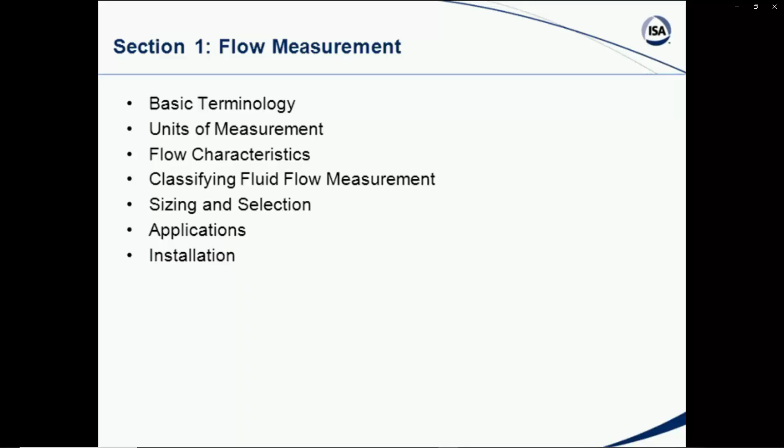Let's talk about flow first. We're going to look at various terminologies. What are we talking about? We're talking about measuring flow. How do we go about selecting some flow devices? How do we classify flow measurement, and some of our applications and some installation? Now, we won't get heavy into a lot of theory, but just to say, in fluid dynamics, this is a basic Darcy formula that you look at in fluid dynamics, showing the pressure drop in feet of fluid flowing through a pipe and how it's related to the fanning friction factor, and of course, the length of the pipe.

Notice we have a factor of V, velocity of the fluid, which is squared, and that's divided by the inside diameter of the pipe and involved with the acceleration due to gravity. Notice the square root function on velocity is related to the differential or the drop in head, and that's how we'll see later on how we get into the square root relationships in certain types of flow measurement.

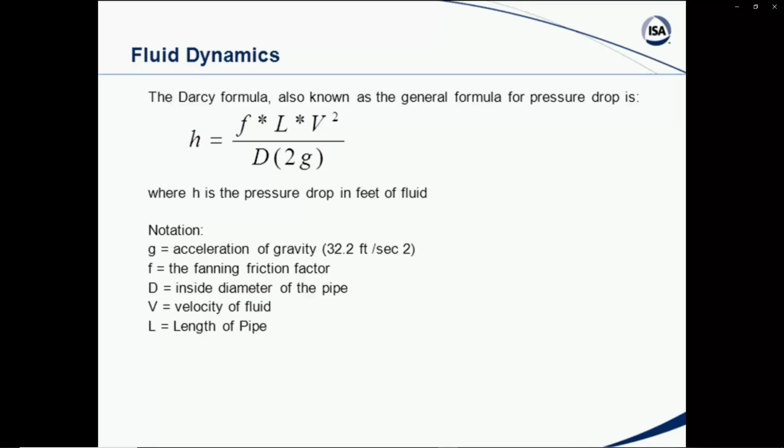So this is a basic fluid dynamic equation for flow. Now, if you go through a lot of derivation and theoretical mathematical calculations, you can come out with a couple of formulas that will be very useful to us, and this is one of them, where we're talking about the measurement unit to express the rate of flow, the velocity.

In other words, how fast is a particle of a substance moving over a given period of time. This is one of the common things that we talk about, the velocity of the flow rate of a fluid, whether it's liquid or it's gas or steam.

And the basic equation, if you go back and work through a lot of the Darcy situations there, is Q is equal to AV, where the volumetric flow rate is equal to the area of the pipe times the fluid velocity. And we will use this as a basis for a lot of the measurement techniques and technology that you use for flow.

Right below this, you will see that I have put in a second equation that says that Q is equal to 3.12 times AV. This is true when you're dealing with gallons per minute. The area is in square inches, and the velocity is in feet per second, which is our normal units that we use a lot for this particular equation.

So what I've done is work out to 3.12, a numerical constant, taking into account feet, inches, seconds, minutes, etc., so that we don't have to do that every time we make a calculation. But do remember this basic equation, Q is equal to AV, and it will be the basis for a lot of our flow measurement.

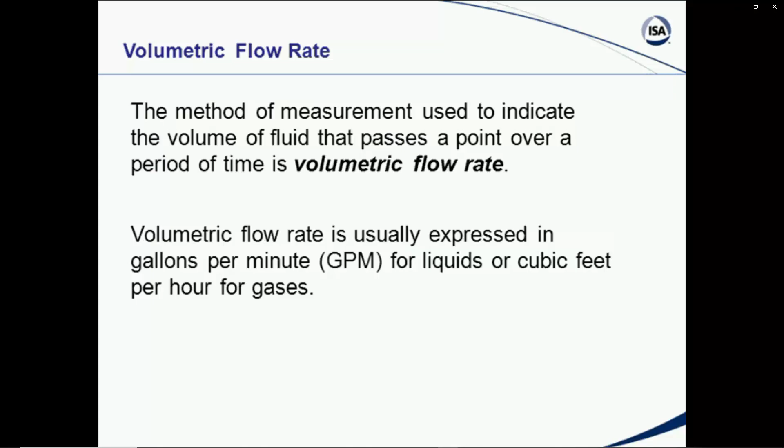We'll talk about some of that a little bit later on. But volumetric flow rate we use quite a bit. Also, though, we talk about mass flow rate. And as the name indicates, mass flow rate is determining the amount of mass that passes a specific point over a period of time. In other words, the weight that's flowing through the system.

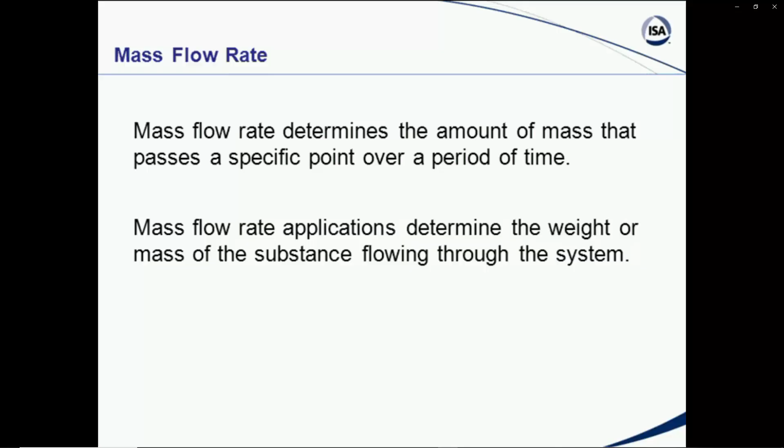And the mass flow rate of a liquid would be the density times the volumetric flow rate, would give you, in other words, the mass flow rate would be equal to the density times the area times the velocity. And so we will be talking on occasion about mass flow. That will come up in some of the situations we look at. And, of course, in steam flow, we normally talk about pounds per hour, which would be the weight pounds per hour that's actually passing.

A critical factor that we need to understand is what a flow looks like in the line, and a relationship of a factor called a Reynolds number. The Reynolds number basically is the ratio of the liquid's inertial forces to its drag forces, and it has to do as the flow is proceeding down the line.

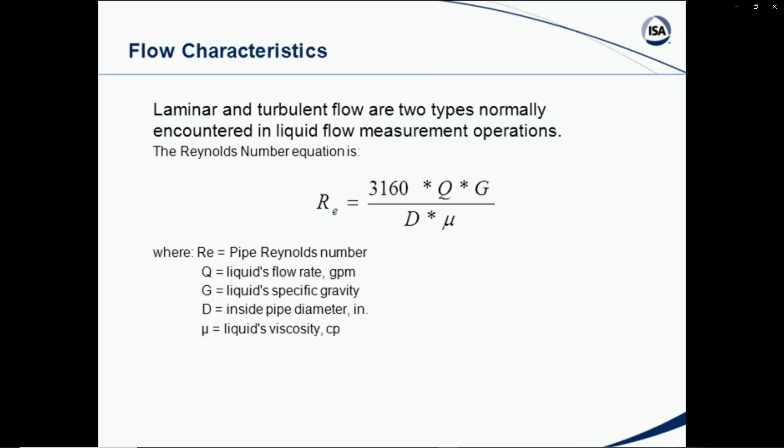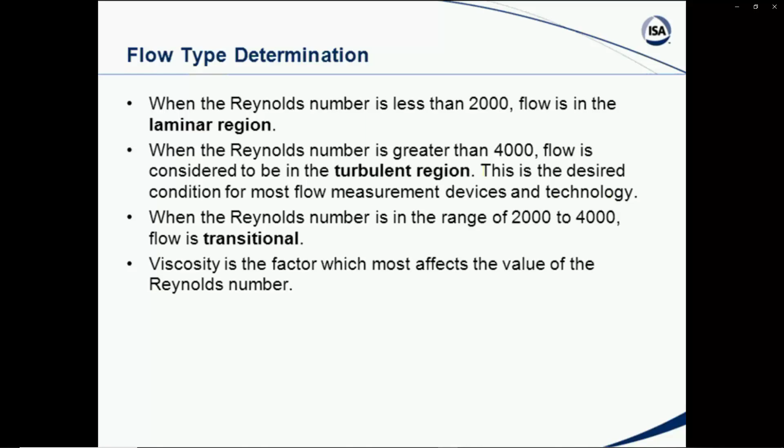So we have 3 regions that we look at. One is called the laminar region, where our actual Reynolds number is very low. We also have an area called the turbulent region, which is actually what we want to have. We would like to get a Reynolds number above 4,000. Actually, in some books you'll read, you'd like to get it up to 8 to 10,000, because between 2 and 4, or even up to 6 or 8, you can still be in what's called the transitional region, and that is an area we don't want to be in because of the velocity profiles we looked at earlier. So typically, the higher the Reynolds number, the better our velocity profile is, and the better our chances of making an effective measurement of flow.

Let's classify our flow measurements into 4 categories: inferential, velocity, volumetric, and mass. We're going to move through these briefly so you can see how these things relate to each other.

First, I'm going to mention the differential pressure measurement. Differential pressure type measurements come in many different forms, but basically they can be used to measure the volumetric flow rate of liquids, gases, and vapors, including steam. As we'll look at a little bit later, there might be some limitations because of suspended solids in the stream, maybe viscosity, and certainly Reynolds number has to be looked at. However, they're very simple, they have no moving parts, and they're easy to use. They do create a non-recoverable pressure loss, and they lose accuracy if you foul them.

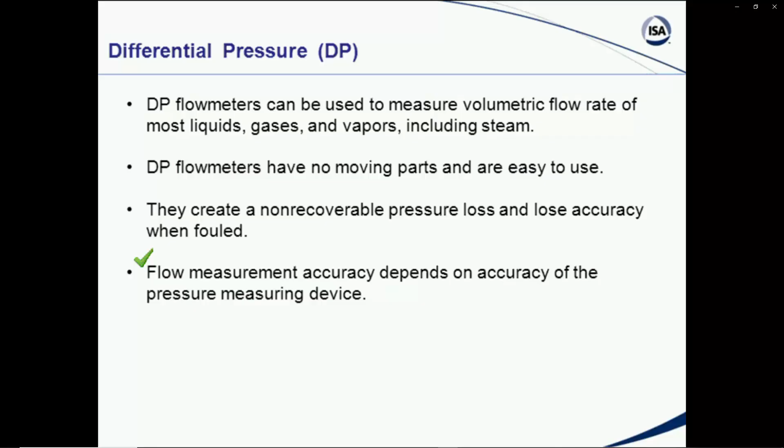The non-recoverable pressure loss is to be expected, because to have a differential pressure, you've got to have a restriction of some nature in the line that drops a pressure as you increase velocity moving down the line. But that change in pressure, or the differential, is predictable and can be used for flow measurement, and is used in many cases by several different devices. The accuracy, of course, also depends on the accuracy of the differential pressure measuring device itself. So you've got to have the sensor, which is a differential pressure restriction in the line, and then you measure the differential pressure to determine what that flow rate is, which is predictable according to the type of measurement being made.

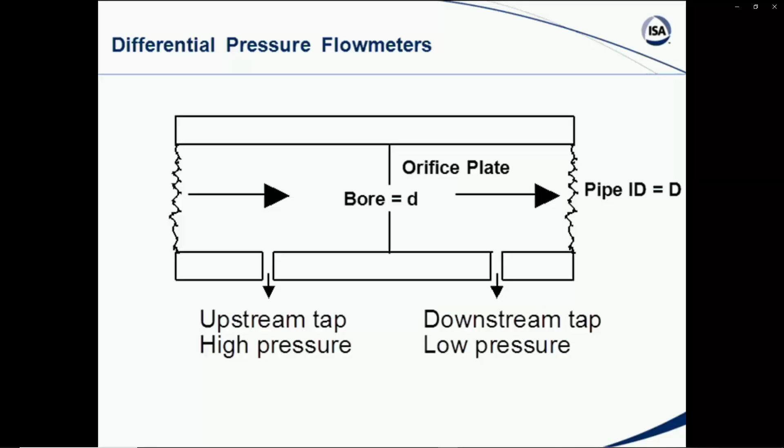We will be interested in measuring the difference between an upstream and a downstream pressure. That will be our differential pressure, based on the amount of flow going through the bore, or little d, the diameter of the bore, as well as the overall big D, or pipe ID. There are different types of devices that can be used and are very helpful in measuring using differential flow.

As I tell a lot of people, if we have 100 gallons per minute here, what's my flow rate here? It's going to be 100 gallons per minute downstream, and that's also the flow rate going right through the primary element. If our number of gallons per minute is the same, remember Q equals AV.

The only thing that's changed is the area. As that area becomes smaller, our velocity rises, it increases. Just like you move an electrical current through a resistor in an electrical network, we have a pressure drop instead of a voltage drop.

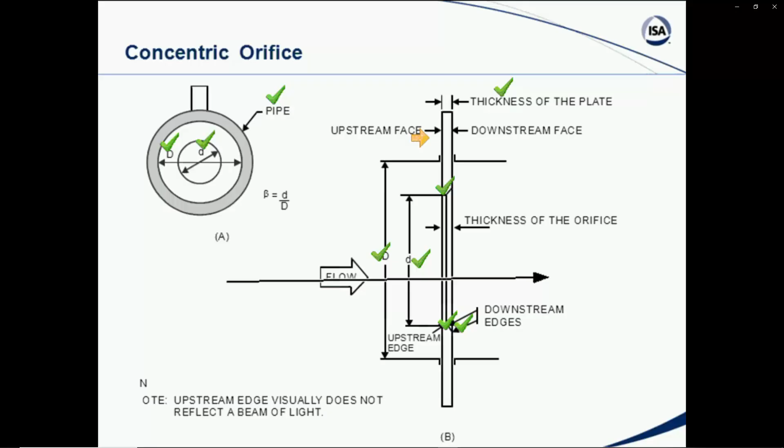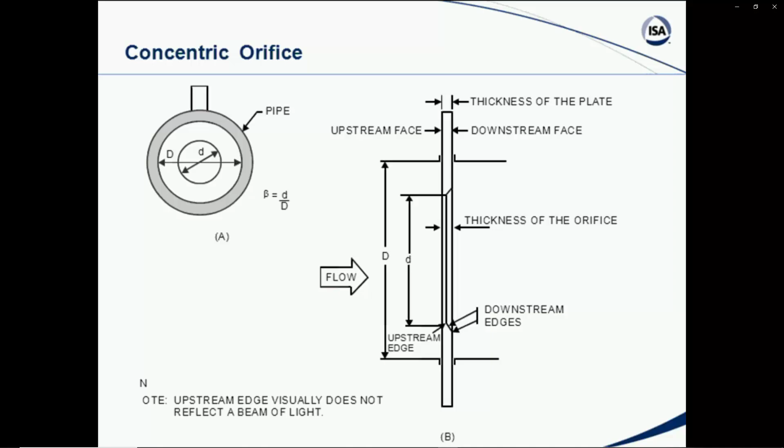There are several different intricacies we won't have time to talk about, such as an eccentric plate. There's also a segmental plate, and there are occasions where you might see a little 1/8-inch hole either at the bottom of the line when you're flowing gas, so that liquids might drop out and drain down the line. Or if you have a liquid flow, you might have a small 1/8-inch hole at the top of the pipe in the plate, so that any gases formed may vent down the line. These are called a drain hole and a vent hole. We could spend a lot of time talking about orifice plates — they're very common, you see them in many, many industries.

Then we have to look at where we check this pressure. Different types of taps exist. On some larger lines, many people prefer what's called radius or vena contracta taps, which are actually about D and D over 2 with respect to upstream and downstream. This measures the incoming pressure to the differential pressure device, and then the pressure at the vena contracta, which is the lowest point of pressure.

On some of the smaller lines, we may go to what's called flange taps. These are drilled right into the flanges themselves, where 300-pound flanges are used, and you measure the differential with these taps right across the orifice plate. These are very useful particularly for line sizes 8 inch and smaller, maybe 6 inches and smaller. It depends on how this particular company or facility likes to handle their orifice plates as well as their taps.

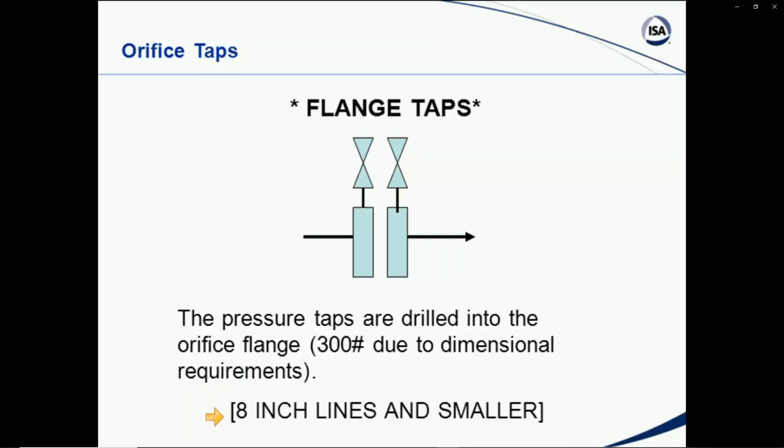So we see here how these are set up, and to recognize, could be on the exam, you might have to recognize another type of tap called pipe taps. While the vena contracta radius taps were taps in the pipe, this is a particular type where the upstream tap is 2.5 pipe diameters and the downstream tap is 8 diameters, and effectively what you're doing with pipe taps is measuring that permanent pressure drop.

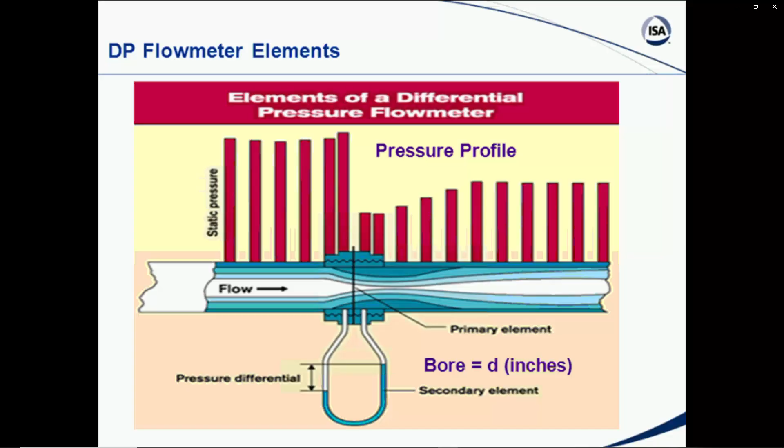Again, if you go back to the picture with the pressure profile, the pipe taps are really measuring the pressure down at this point and this point, whereas with the vena contracta, you're measuring the pressure here and here. So you've got two different sets of relationships, two different situations as far as the drops are concerned, two definitely different types of calculations. There are other types of taps that can get involved, but these are our most common.

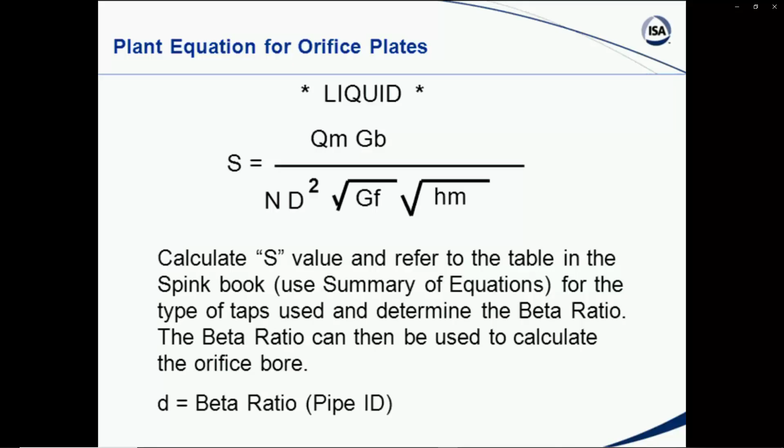In your summary of equations, most of you have that we sent out after the first session, there's an equation which is a good way to size an orifice plate. It's a calculation for an S value, which you can then look up in the back of the summary of equations to find a beta ratio. The beta ratio can be multiplied times the pipe ID, and that will give you the actual inside bore, or little d, for the particular orifice plate. You can see the information you need to make this calculation.

These are the terminology definitions here. Beta ratio is little d over big D. Normally speaking, because of the restrictions of empirical data, that's going to be limited to about 0.25 to 0.75. We also have little d, big D, the flow rates in gallons per minute, the specific gravity which we talked about in another session, the flowing specific gravity, the base specific gravity at 60 degrees, and a unit constant for liquids.

We talk about pressure drop most times in inches of water. When we talk about the pressure drop across a differential unit, it's usually in inches of water. For instance, for liquid, 0 to maybe 100 inches of water, which is about 3.6 to 3.7 psi. The recovery on that, if you were running full bore and recovered maybe 50 or 60%, you might have a permanent loss of a pound and a quarter. Under normal operating conditions, maybe a half a pound, 3/4 of a pound, because you do recover a portion of that pressure drop, but there is a non-recoverable loss also.

Now, the S value again comes from the LK Spink book, but it's also in your summary of equations. There are some tables in the back of the book that you can use to directly calculate the bore for a liquid flow. Here's an alternate equation that you probably won't find anywhere else, because this was derived from the Cameron hydraulic book.

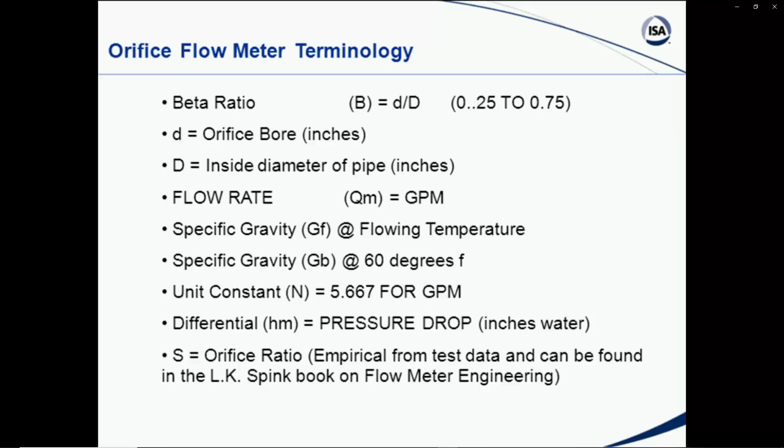So these two equations, for liquids and also for steam or gas, can be very useful for calculations as far as the sizing of an orifice plate. Real briefly, let's go through a few other devices that you will see for measuring flow.

This is a flow nozzle. The flow nozzle, of course, you can see is rather streamlined, but you still have an upstream and downstream differential pressure measurement as the flow comes through. The shape or design on the inside is much more streamlined, and it's very useful for large lines, high velocities, high pressure, high velocity steam, for instance, or other types of measurement, because for the same amount of flow, you get quite a bit lower drop in the flow nozzle than you do in a corresponding orifice plate.

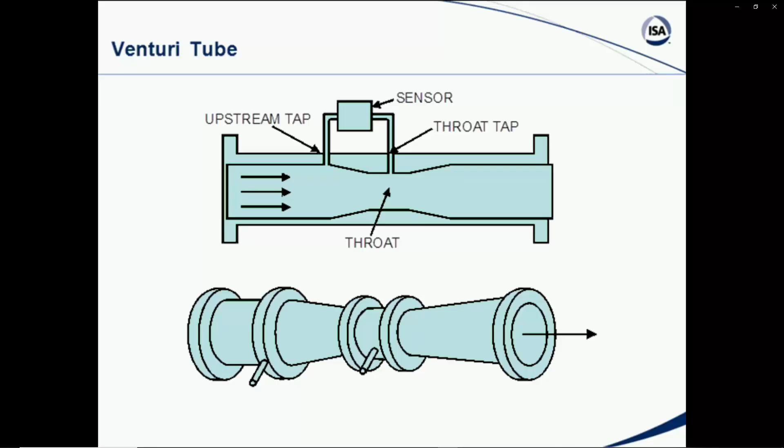And so these can be used in many cases for flow measurement, or a venturi tube, much along the same line. Again, you have the upstream tap and a throat tap. These can be used a lot in very large sizes, and are very useful for different types of measurement. Some amount of suspended solids can be handled here because you have a streamlined throat flow area, which makes it very handy.

Pitot tube is used many times. An averaging pitot tube becomes more handy because it really describes how the velocity check will greatly depend on the velocity profile we looked at earlier. Depending upon the physical location of this pitot tube, it can affect your measurement. But again, it's a differential pressure producing device used in many cases.

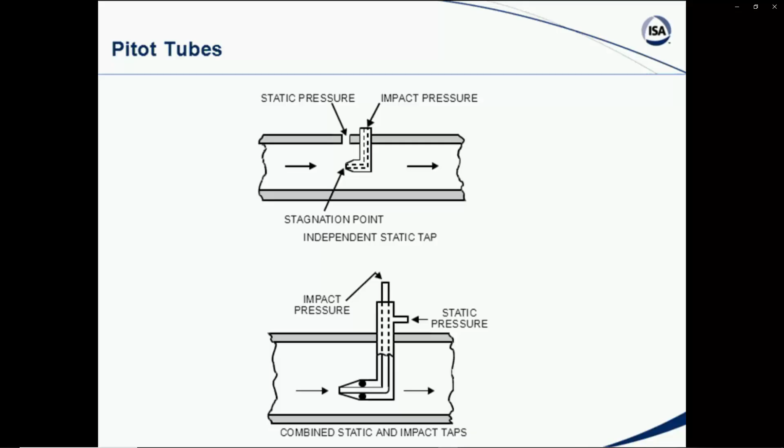Again, an averaging type is used where you actually extend the tube across the pipe with several different holes. So that's some of your major types of inferential measurement, and there are others we simply don't have time to cover today. Let's look at some velocity measurements. One of the types is a magnetic flow meter, which actually sets up a magnetic field across the pipeline.

You actually set this up, and then the fluid flow itself must be conductive. As that fluid flow moves through the magnetic field, depending on the velocity, it generates an EMF that is picked up by the sensing electrode, and that's converted to a milliamp signal proportional to the flow rate.

Whereas the differential pressure unit was inferential because of measuring differential pressure, here we're actually measuring velocity. But since we also know the area of the pipe, and we know that Q, the volumetric flow rate, is equal to the area times the velocity, if we know the area and measure the velocity, then we have volumetric flow rate. They tie together like that.

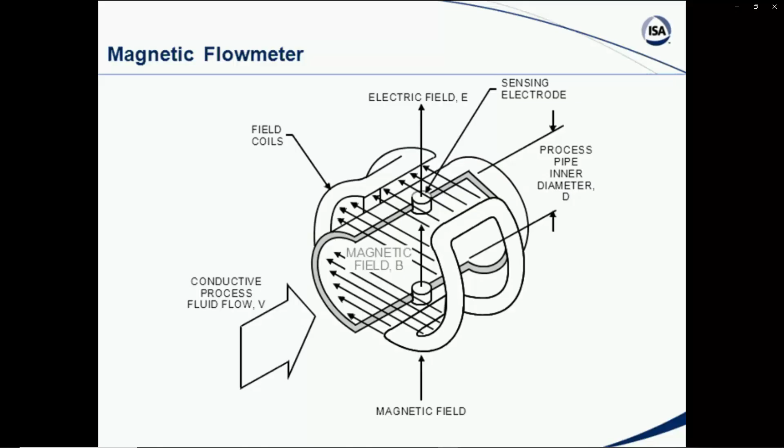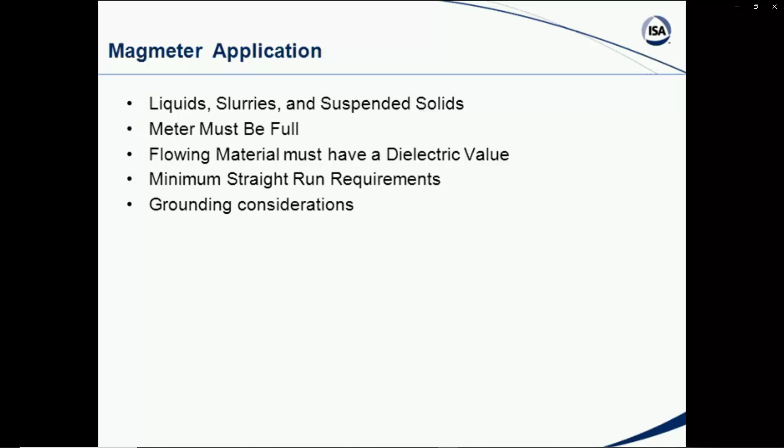So for slurries, liquids, suspended solids, these are just some application notes that could be problems on the exam, some type of scenario problem. The meter must be full. You've got a flowing material that must be conductive, with a conductivity value that lends itself to generation of the electrical value from the velocity moving through. There's very minimal straight run requirements, but you do have to make sure you're grounded properly and installed properly for it to operate. These are some situations to take into account, and mag meters are very useful.

Also, when you talk about velocity, there's vortex shedding or vortex meters, where a bluff body is placed into the line as a sort of restriction. Depending on the velocity of the liquid, gas, or steam moving down the line, vortices are formed, the frequency of which is based upon the magnitude of the velocity of the fluid moving down the pipe. This is called the von Karman effect, showing the flow impinging upon the bluff body and the swirls or vortexes that are formed.

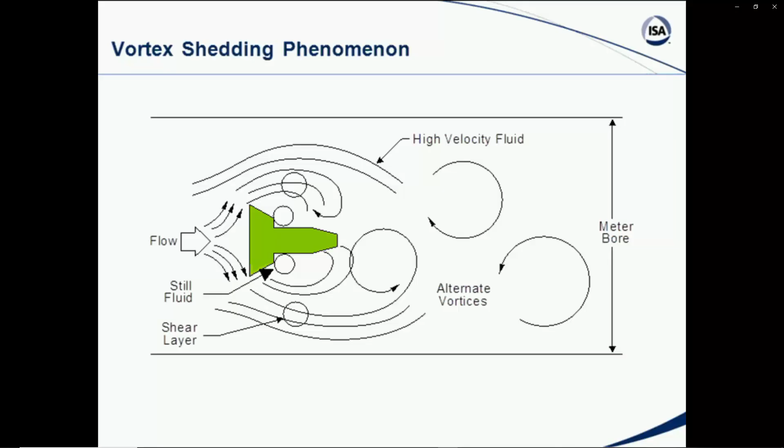The frequency of these vortices is picked up and used as an indication of the velocity of the fluid moving down the line. By knowing that velocity, and knowing the area, Q is equal to A times V, and we're able to make the determination of the flow measurement.

Many people like to use ultrasonics, either Doppler or time of flight. You might have a scenario where you need an ultrasonic flow meter. You can have them clamp-on or wetted. They have certain limitations, but in certain applications like large pipes, flashing or corrosive fluids, they're very useful in certain industries, plants, or locations.

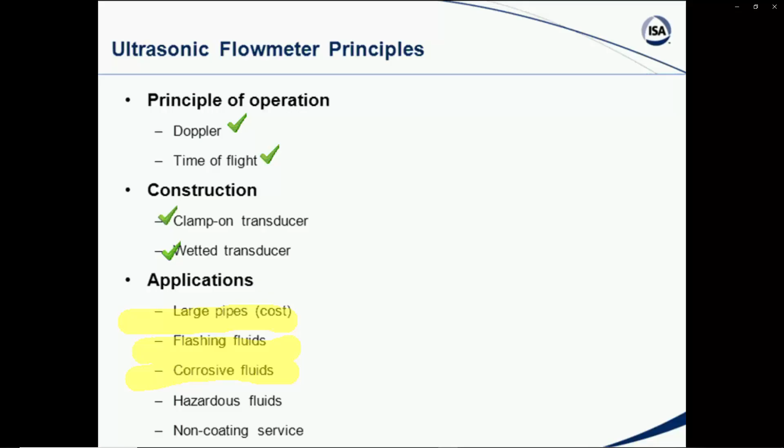Notice that basically you're external to the pipe, and the reflected material depends upon the velocity of the material moving along. Again, we're still interested in that velocity profile. We're looking at the velocity of the fluid, and that velocity is also critical for being able to get a good flow measurement determined.

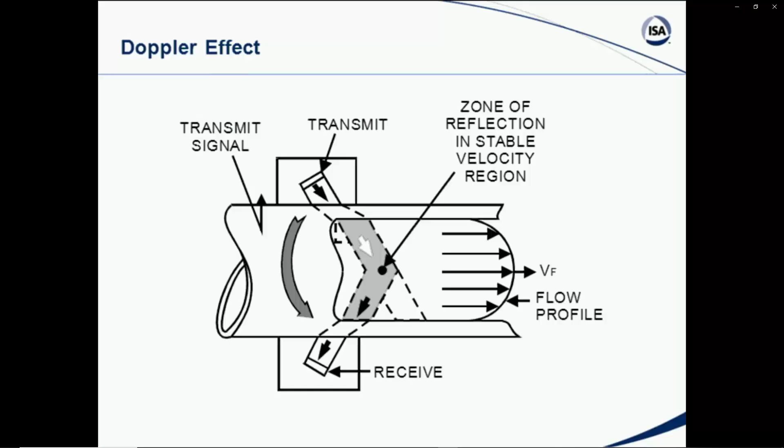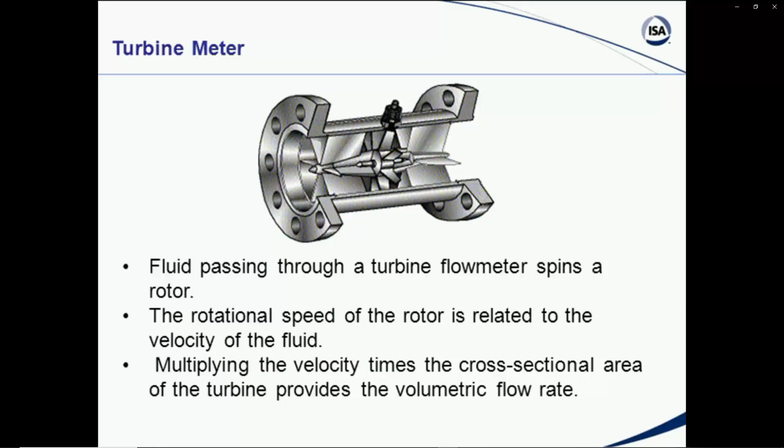The turbine flow meter is used, and many of you may be familiar with these. It's basically a rotor in a line, and as the material comes through, that rotor spins. The higher the rate or velocity, the faster the rotor spins. We pick that up with a sensor, and multiply the velocity times the cross-sectional area of the turbine to provide a volumetric flow rate. It's very accurate, very useful in certain areas.

The mass flow meter - there are only a couple of different ways of measuring mass flow directly. The Coriolis mass flow meter was brought into place several years back. There's also a thermal mass flow meter for gases, but we'll mention this one here: Coriolis, where the flow comes through a vibrating tube. Vibration is set up, and as the flow moves through, the fluid forces react with the vibrating flow tube and produce upward and downward forces. The net result is a twist angle, and this twist angle is directly proportional to the mass flow going through this device. It was originally introduced by Micro Motion.

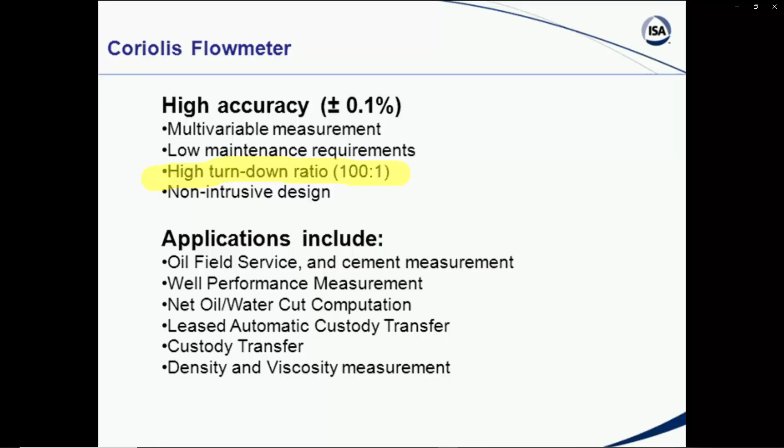When we talk about turn down, we're talking about the ratio of the maximum measurement that can be made at a specified percent of accuracy to the minimal amount that can be measured with that same degree of accuracy. While 100 to 1 sounds a little high to me for Coriolis, it is something like 50 to 1. And the orifice plate is 3 to 1.

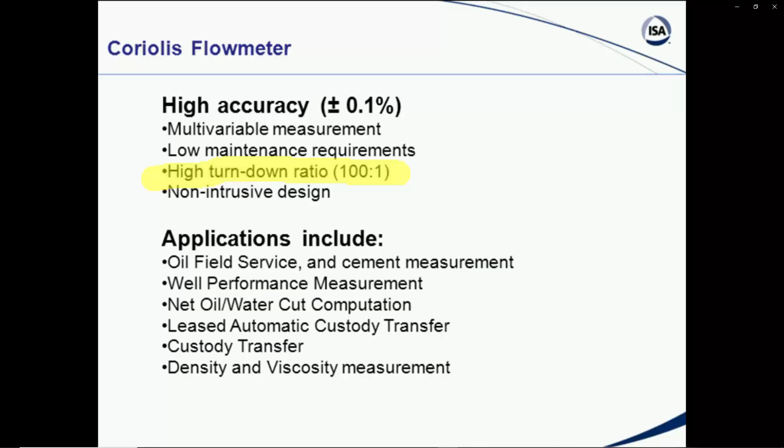That means on an orifice plate, if you want to measure 100 gallons a minute as accurately as you can, once you get below about 30 gallons a minute, you're still measuring it, but your accuracy starts degrading. Notice on the Coriolis, 100 gallons a minute might go down to like 1 gallon a minute. This is showing some application points, so you might make a note of these and be aware of that.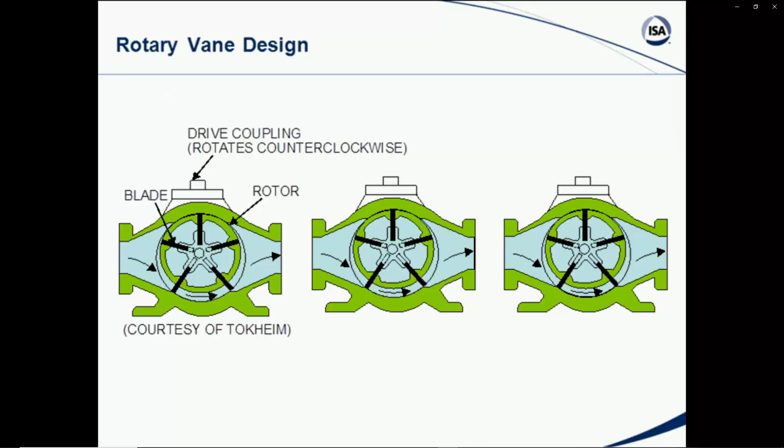This is just showing a rotary vane design of how the material comes through. It's actually rotated through in a measured package of volume, and continues on down the line.

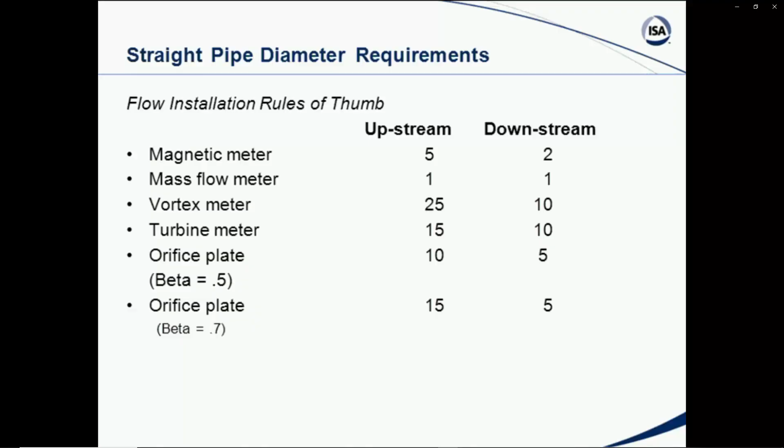Different meters do require different amounts of straight run. That's so you can have less disturbance or turbulence in the flow rate. Notice an orifice plate might need 10 to 15 diameters upstream and maybe 5 downstream, while a magnetic flow meter requires much less. The Coriolis requires basically none. You need to be aware of that in case there's a question about straight run requirements. While these are rules of thumb, they definitely can come into play and might be involved in a question.

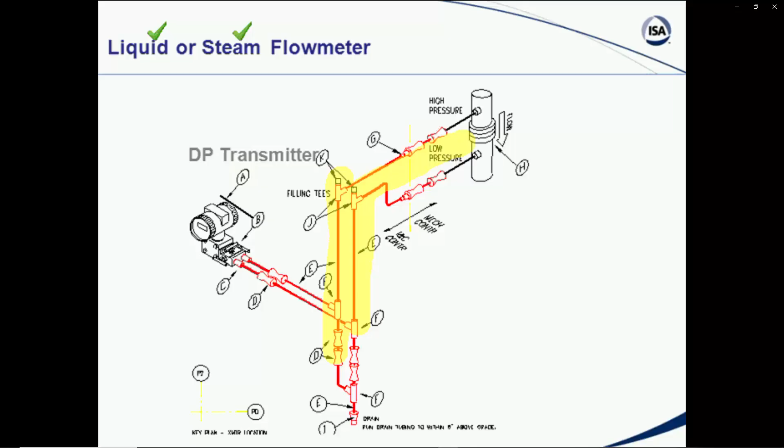We offer that as a reference document for you to look at. As far as installation, recall we talked about pressure. For liquid or steam, we prefer to mount this below the connections, so that if there's any gas formed in the vapor, it would go back up into the line. This is showing that in a format with our differential pressure transmitter out here to the side, with our lines coming down and so on and so forth.

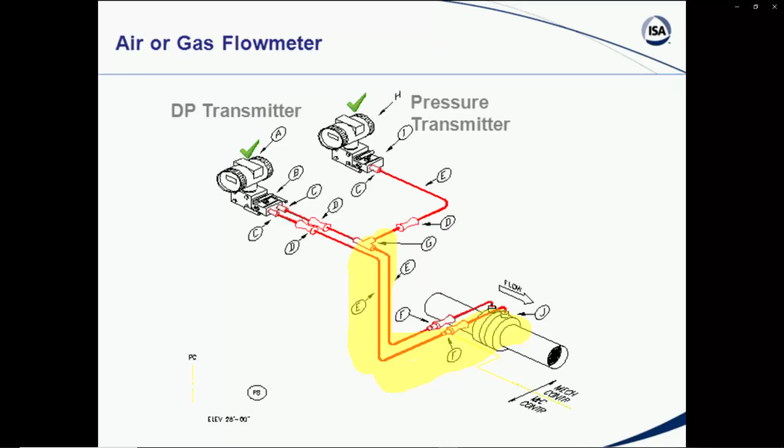This would be how we'd install on liquid or steam. If we had it on air and gas, notice this time we're mounting our differential pressure or pressure units above the tap, so that any liquid or condensables that may be formed in our vapor, air, or gas lines, will drain back into the line. So these are just a couple of installation details for your reference on how to install devices.

I know that was a pretty good pull there. Flow measurement is very, very important. There's many, many ways to measure flow. Differential pressure is economical, but has some drawbacks. A lot of these devices are inferential. You do need to take into account straight runs. We talk about volumetric flow rates, so you need to determine - are you talking about gallons per minute or pounds per hour?

Is it a mass flow? There's a lot of new state-of-the-art devices and improved devices in play. You need to know installation requirements, and you'll probably have some scenario situations on the exam that will give you a flow type or situation and have you select the best device for it.

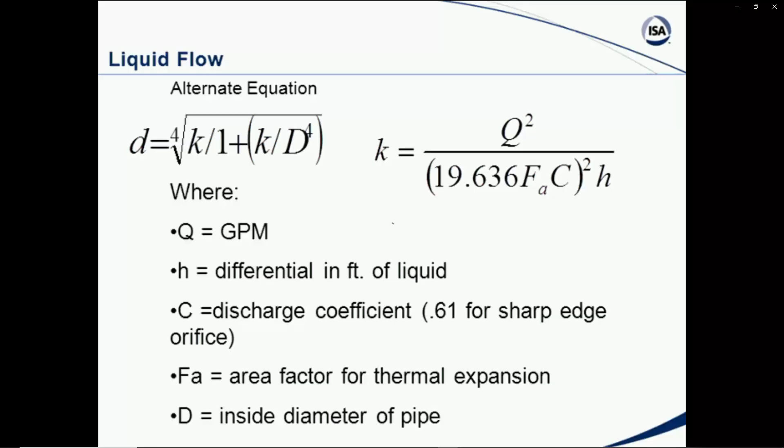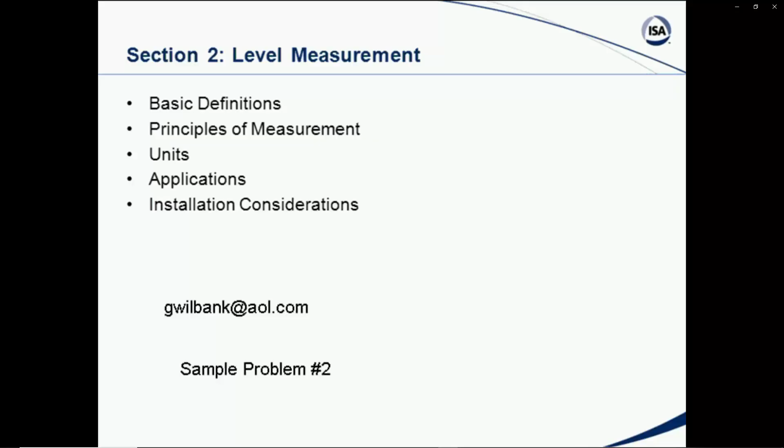So write that down, and we'll move on into measuring level, which is our second topic today. Flow is a wide topic, level is a wide topic too. We'll make up a little time on temperature later on, but we want to treat all of these.

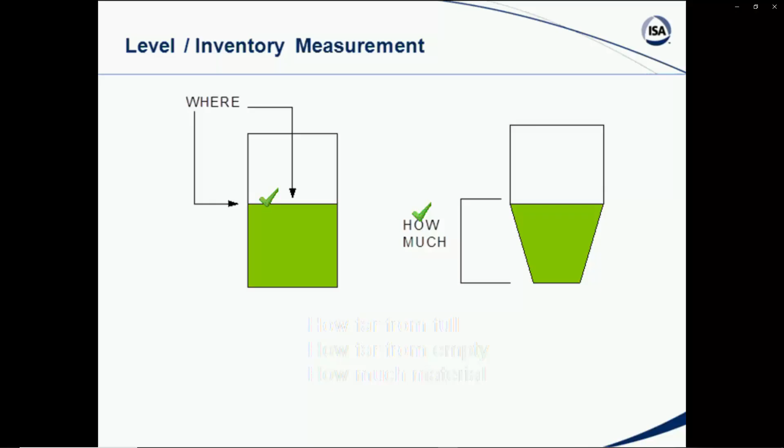Level is just trying to see where something is, or how much is in a tank, a vessel, some sort of storage container. It could be solids, it could be liquids. We talk about liquid level a lot, but it's actually the interface point between a liquid and a gas, or a solid and a gas, or between two liquids. We want to know what that is, either for operational purposes or for inventory measurement.

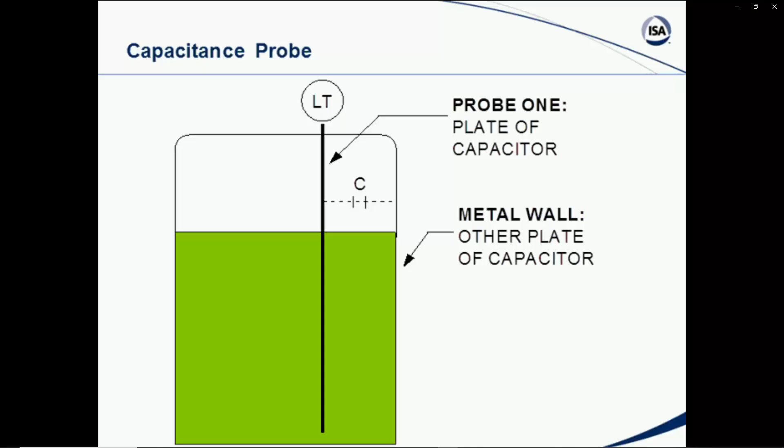Capacitance probe, as we show here, the capacitance will vary between the two probes, whether you have two probes or a probe and a metal wall, as the level rises and drops in the tank. Of course you can have coating and buildup on the probe. You've got to have certain types of material that's fairly constant, so there are some limitations on that.

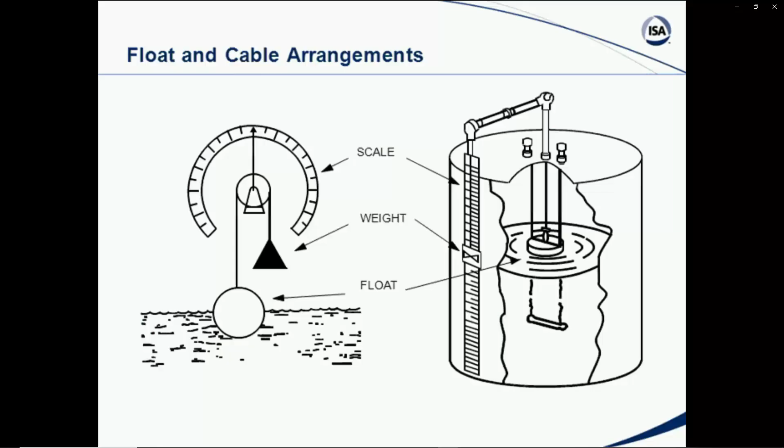It is inserted into a tank as this type of measurement, which is the old float type. Basically it's a float that rides on the surface of the liquid, and it can either drive like a board up and down the side of a large water storage tank, or it can move in a rotational type situation, which can generate an output in milliamps, or it can be other types of floats. Float devices are designed, sized, and balanced with the specific gravity to actually float on the surface of the liquid, and it's very critical in that design.

You have to be careful of several things that can give you problems here. Foam on the surface could be a problem. If you have a lot of suspended solids, or maybe dust or whatever in the atmosphere in the tank, that could cause a problem with the measurement. Changing different types of materials could be a problem. But within certain bounds, it can be a very effective way to measure level.

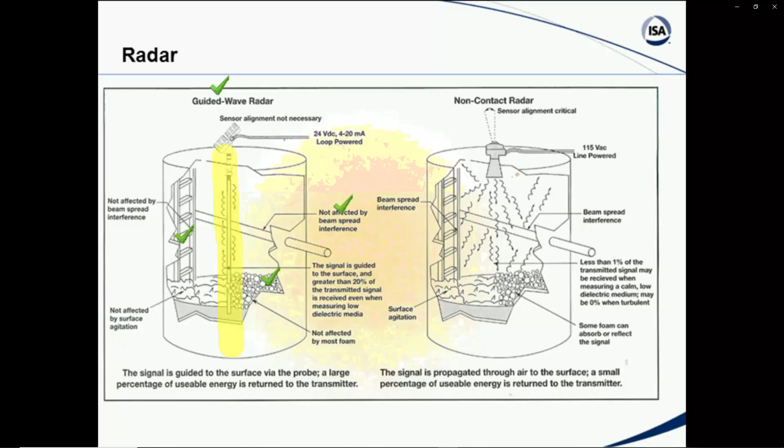This slide is depicting the guided wave radar, where the energy is guided by a probe down into the vessel, and you get most of the usable energy returned back up to the sensor. You're also not affected by some of the other things that can be a problem, like different types of interferences, ladders in the tank, bubbles on the surface. Foam doesn't really bother it very much, and it's a little more effective in some cases than the through-air. The through-air, of course, is fine.

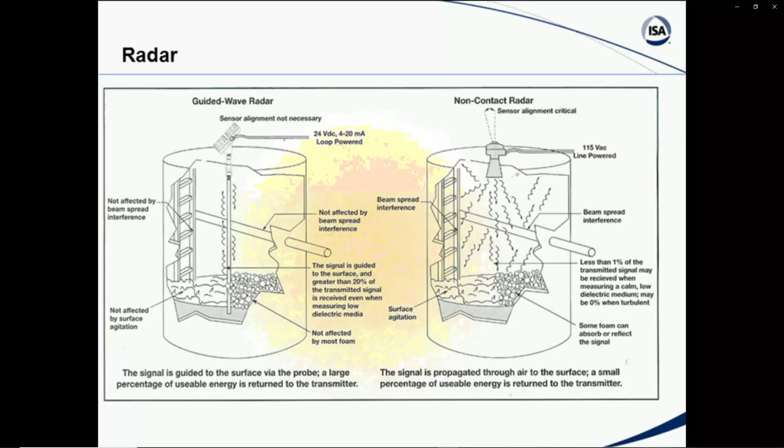It's a non-contact type. You do have to have it aligned pretty close. Again, it does good if it's a fairly clean environment with very little foam maybe, but you also have to be aware of any interferences within the tank. But both of them are the radar type sensing, and have become very popular in recent years, over the last 10 or 15 years, used in many different types of applications to measure level in rather difficult circumstances.

The pressure that allows the bubbles to escape is reflected back up toward our indicator recorder, so that we actually get a measurement of the actual height we have above the bottom, or the outlet of the dip tube. Very reliable, old, dependable, as I said, goldie but oldie. Used a lot in some industries, not very much in others, but it's still a differential pressure, inches of water type transmitter situation. The magnetostriction that I mentioned earlier is used in some cases. It's based on a waveguide with a float that rides up and down on the material.

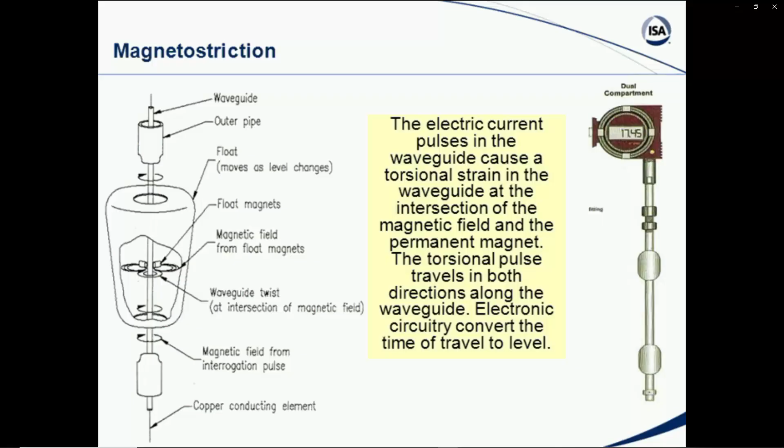So the magnetostriction is a combination of electrical, but it's also a float actuated device. Again, you've got mechanical materials within a tank, within a vessel. That's one of the drawbacks, but it's very effective, fairly economical, and used by a lot of people.

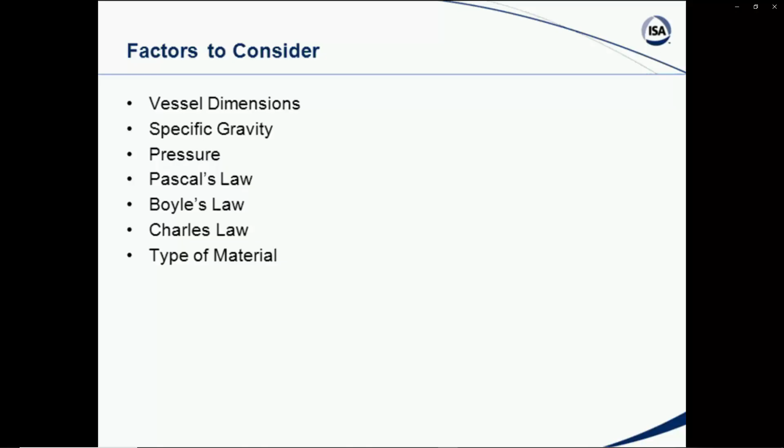As we've talked along here, some of the factors you have to consider: what kind of vessel are you dealing with, what specific gravity. We've got to look at Pascal, Boyle, and Charles's law too, the ideal gas law, and also the law that says when you impose a pressure on an enclosed vessel, that pressure will be transmitted equally throughout the container. That's how we operate with our differential pressure, our high and low pressure on that. Also, what type of material do we have in the tank? What's the environmental considerations? Are there dust within the tank, and so on and so forth?

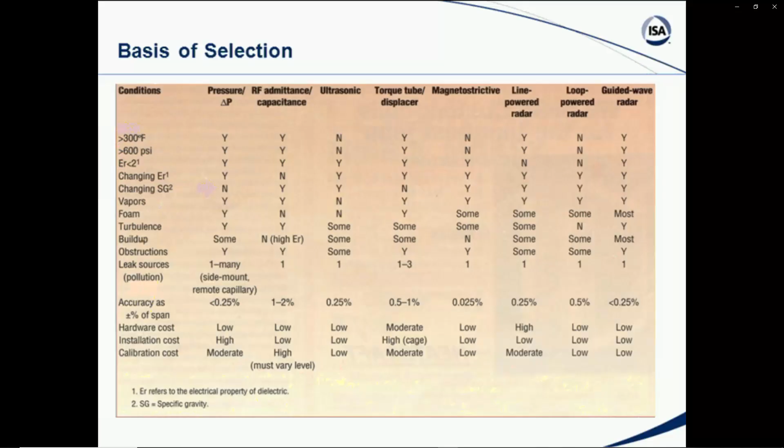You will probably have circumstances where you will be given a scenario or some type of a level measurement to make, and they'll ask you to select the best choice.

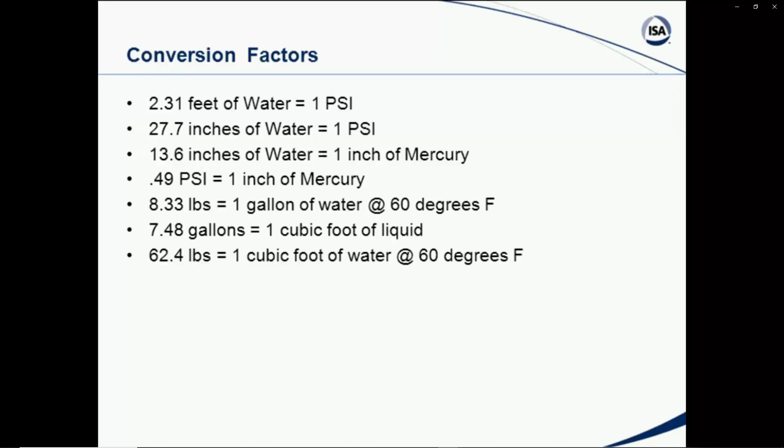Half a PSI is about an inch of mercury. Notice the 8.33 pounds per weight of a gallon of water, and you can put 7.48 gallons in a cubic foot. If you multiply them together, you get the useful term of the overall density of water of 62.4 pounds per cubic foot. These are some I think you need to either have handy, have them in a table or somewhere you can look at, because they may be very convenient for you.

If you look at measuring level using differential pressure, this is showing a flange-mounted differential pressure transmitter. This has a shutoff valve also connected onto the tank nozzle. Notice in this particular case that we have vented the low pressure side because it is a vented tank. And when you have a vented tank, of course you don't have to have that.

This was a pressurized tank, going back to Boyle's law, and even if you look at the ideal gas law, PV equals RT, and some other things you run into with compressibles. When you apply pressure on this tank, that pressure must be transmitted or applied both to the low pressure side and the high pressure side, so that they will cancel each other out. So with a vented tank, though, you can vent the low pressure side because atmospheric pressure is your reference at this point.

This shows another situation of measuring level using our high pressure connection, our low pressure connection, and our differential pressure transmitter. This is just showing how this would be done as far as a liquid level measurement is concerned.

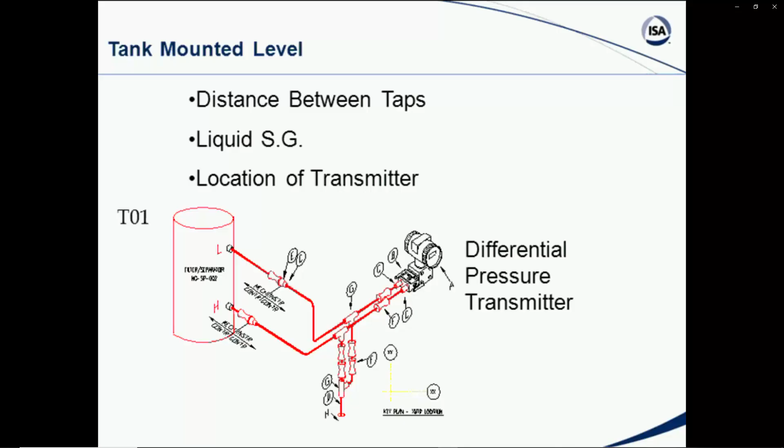Keep in mind you might have a situation where you have to take into account the hydrostatic head from the liquid fill leg between the taps in some cases. But this shows representatively how you would do that. You'd have liquid in the lower connection, liquid in the other, and you'd have to take that into account in your particular situation.

Real quick span and range calculation. Let's look at these three situations, A, B, and C. If we look up here at System A...

Our LRV is going to be equal to what? If you drain that down, notice it's a vented tank in System A. If we drain it, we'll actually end up with 0 inches of water. And if we then look at our URV, we need to fill the tank to 20 inches. The 20 inches times 1.2 will give us 24 inches of water for our URV.

Then if we come over to System B, let's look at what our LRV will be. What do you think it's going to be? Well, you're going to have 2 inches that you have to take into account. The 2 inches here times the specific gravity of 2, so it's going to be 4. LRV is going to be 4 inches of water. So we will have 4 inches of water, okay?

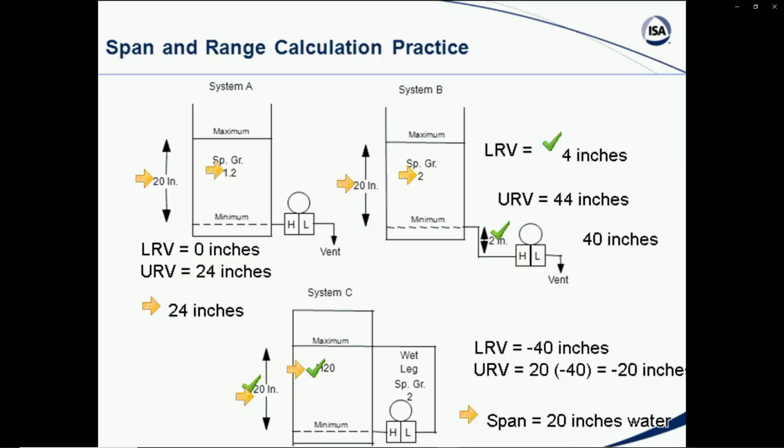That could come in handy in a particular situation of understanding that part. Level, again, is one of our key primary variables. It's very important, and the applications vary according to the physical condition of the vessel and the tank. You've got to look at coating, fouling, interference, temperature, and different characteristics of the material. Does it have a dielectric constant? Is it conductive? You have to be careful when you apply external transmission type devices, because they can give you problems getting the level in the tank. There are many we didn't talk about, like load cells, nuclear radiation, and others. This is just to give you a little flavor and review as you head towards the exam. We'll pause again to see if there are any questions or comments.

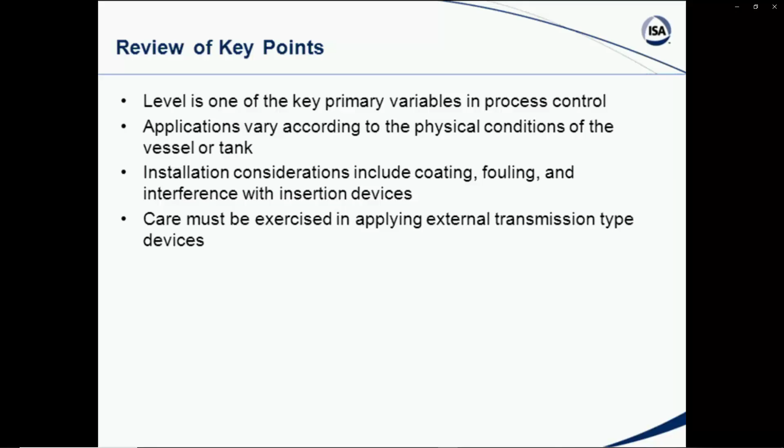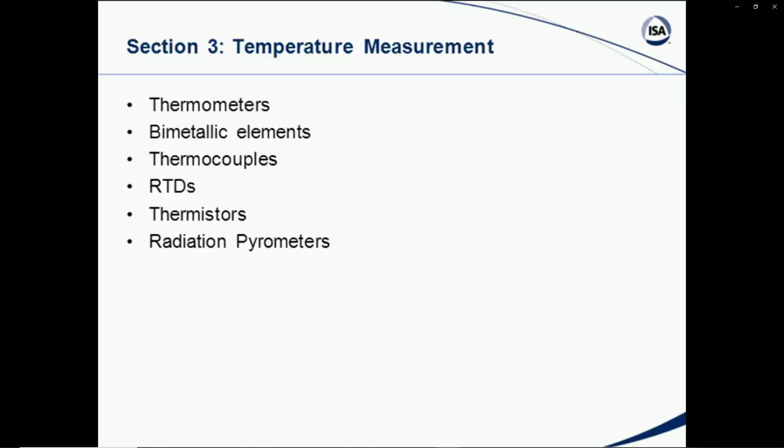We'll move from that into our third section today, which is on temperature measurement - another process variable that's very key. I know there'll be some questions involving temperature, or if not exactly the temperature elements and thermometry itself, you'll be involved with how to measure temperature, or certainly how to control it, or what type of characteristics it has, etc. So let's brush through these real quick on some samples of things you might have.

First of all, you need to understand temperature, if nothing else, because of the different types of scales you may run into. We're all pretty much familiar with degrees F and degrees C, Fahrenheit and Celsius scale, and that water will boil at 212 F and 100 degrees C, and water will freeze at 32 degrees F and 0 degrees C. So we're pretty much familiar with those. But on occasion, on the exam, you will have circumstances requiring understanding of degrees R, or Rankine. Rankine is a scale related to the Fahrenheit scale, but it's plus 460 degrees. So you can see very quickly there that the 32 becomes 492, and 212 becomes 672.

So you need that, and that spreads the scale out from, you see 0 is minus 459.67. You will see degrees Rankine in some calculations dealing with various gases and fluids of that nature. So it's used in some calculations, and you need to be very mindful of your units.

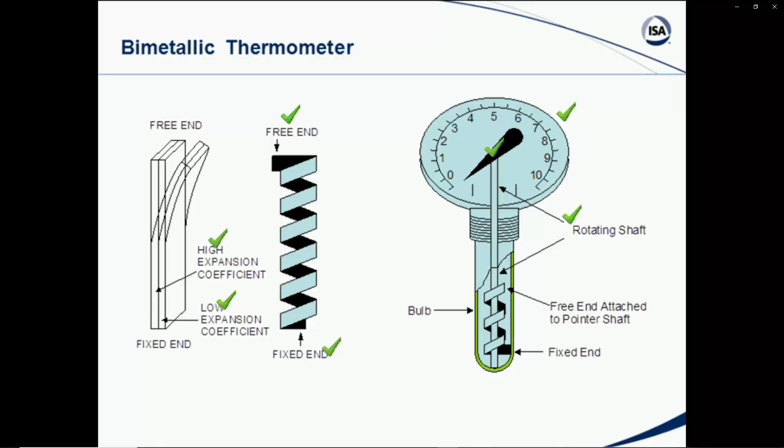And that very simply, of course, the scale can be everything from a half inch in diameter up to 5, 8, 10, 12 inches now, depending on if it's mounted on a panel or on a line or whatever it may be, wherever it may be located. So these are just local indicators and not really involved in the transmission part.

Most of our temperature measurements for transmission, of course, they may be filled system transmitters. You don't see as many of those now as you used to, but the types that we're going to focus on here is going to be thermocouple.

The thermocouple is the first one to look at, which a measuring junction is set up with the junction of two dissimilar metals. And those dissimilar metals are junctioned at the other end at some reference point, reference temperature, if you will. Normally we use a reference junction temperature of 32 degrees Fahrenheit, that's a freezing point. And as the temperature at the measuring junction goes up, a predictable EMF will be generated. The difference between the temperatures will generate a predictable EMF, and that EMF is relatable to the actual degrees of temperature.

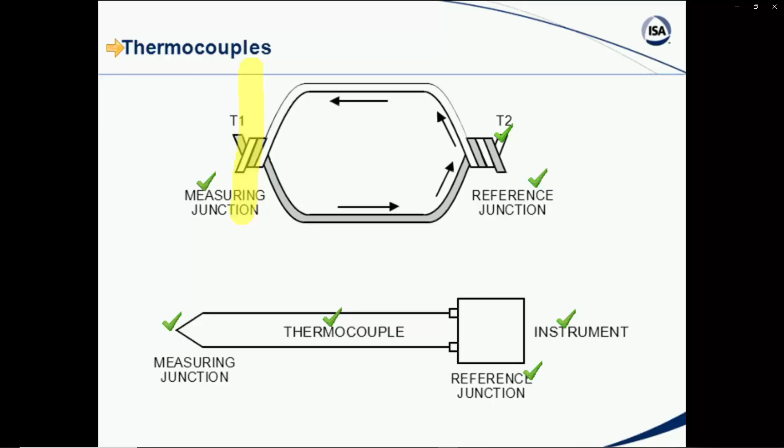Now, if you look at an industrial type, the measuring junction is fabricated into a thermocouple. This is brought back to some sort of an instrument at some point that has an electronic reference junction. Then the types of thermocouple that you have will generate a corresponding EMF that can be related to temperature.

Thermocouples have a lot of advantages. They're used extensively in some industries, not as much in others. ISA does have standards that show the standard thermocouple materials that you will be exposed to.

You ought to at least be able to recognize a type J as being iron constantan, being the street name of iron over copper nickel. The type K is very common, being nickel 10% chromium over nickel 5% aluminum, which the street name is chromel alumel. A lot of you will recognize that one.

And then also the type E, you may see that in some places, which is the chromel constantan. You say, well, why have these different types of thermocouples? Well, notice that they have different characteristics.

Notice the chromel alumel will go to a much higher temperature than the corresponding iron constantan will, and so therefore it has a lot of usages in some of the power industry and boiler areas, things like that. And then also in this particular table, they do show some characteristics of these thermocouples, which one is more linear, which one is related to different temperatures.

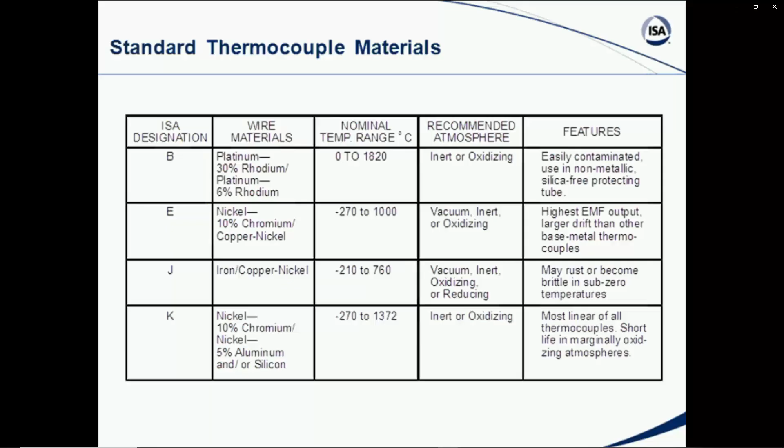But these are standards, ISA standard designations. They do not vary from manufacturer to manufacturer. Here's some others that we see here. T, for instance, is a copper constantan thermocouple, so on and so forth. You see the different temperature ranges for these different types. But all of these are the junction of two dissimilar metals with a corresponding reference junction, and an EMF is generated, predictable according to the Seebeck effect, and can be used to measure or relate to and display the temperature of the particular measurement.

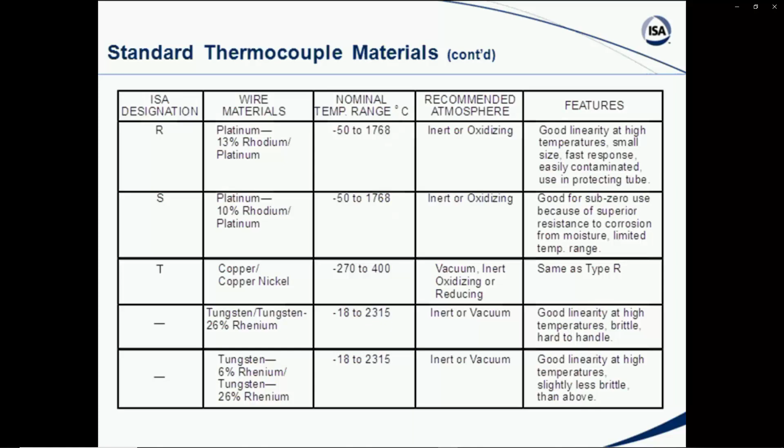So you have a complete set like that, and physically they are installed in a protection tube or thermowell in most cases, with the thermocouple actually inside the protection tube, and it can be brought out to a head and junction area there. The protecting tube or thermowell is very critical in many applications. Most all thermocouples are put in one so you can remove them for replacement or maintenance. Of course, the insertion length is based on how big the tank or vessel is, or what size line you're installing the thermocouple in. So this is all very critical to getting these at the right location to pick up the proper temperature.

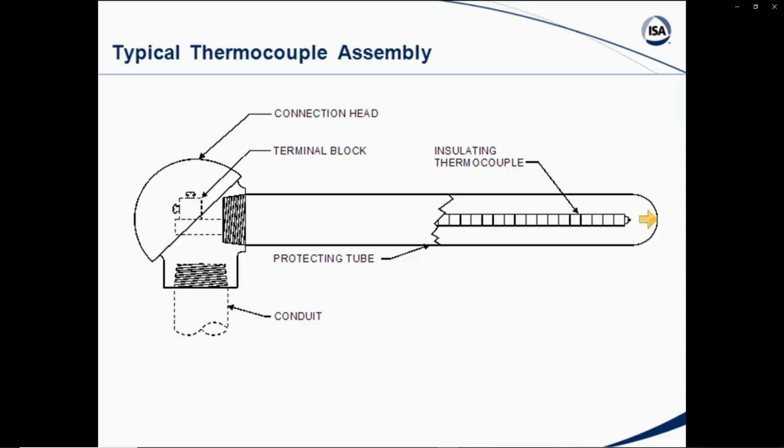So the second type of temperature sensor we'll talk about is RTD, resistance temperature detector. In this one, the resistance varies as the temperature changes, whereas on the thermocouple, the EMF or voltage changed with the change in temperature.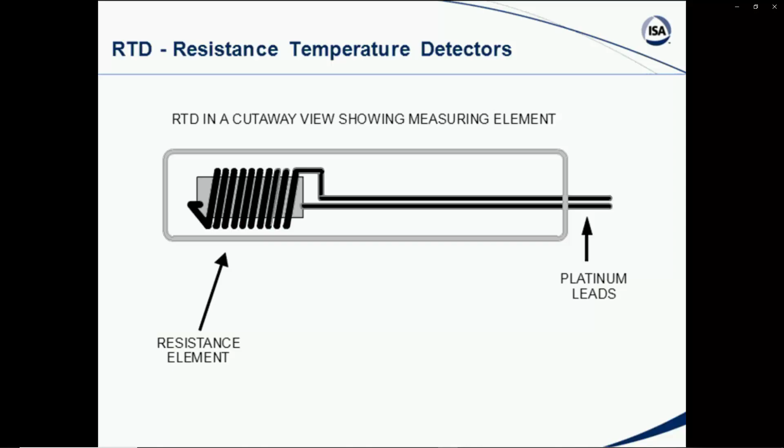So here we see an RTD in a cutaway situation, and we have a resistance element, which many times is a platinum lead, wound around a mandrel of some description, maybe a ceramic type mandrel. As the temperature varies around this device, the resistance will change. And that resistance change is predictable, giving you an output of 4 to 20 milliamps corresponding to a certain temperature range. So again, many industries use RTDs almost exclusively.

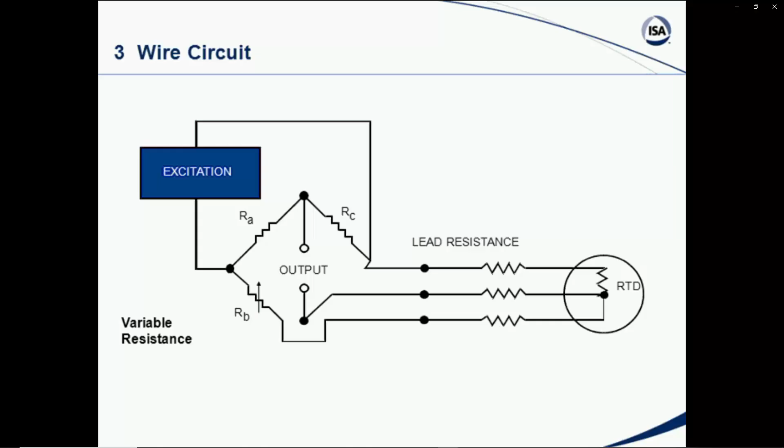So a 2-wire RTD has that drawback, and for the most part, you will see in industrial applications using a 3-wire RTD so that you offset or compensate for a portion of the lead resistance. You can go further to a 4-wire RTD, which compensates for all the lead resistance, and that is used a lot in labs and things of this kind. Normally, most of the time, I think 3-wire is what we see primarily in the industrial world as far as applications are concerned. A special case of a

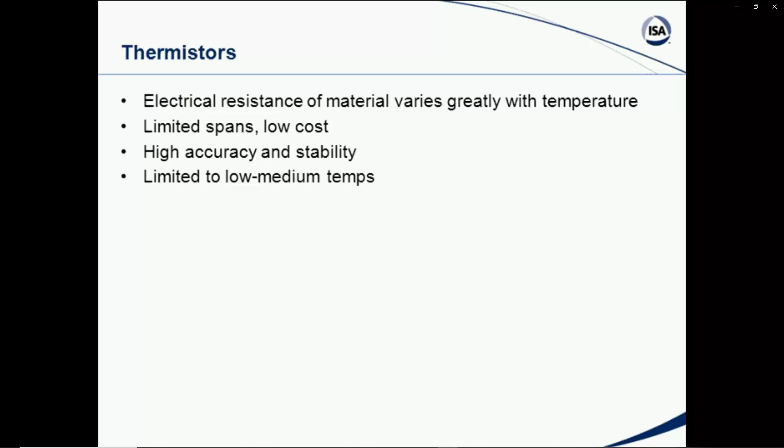RTD is called a thermistor. There, the electrical resistance of the material varies greatly with temperature. You'll see these a lot installed where you have limited spans, fairly low cost, some high accuracy and stability, and low to medium temperatures. In other words, you will see these as part of OEM supply. You will see these embedded in the windings on motors, installed in switchgear. They're economical, so most of the time it's part of an OEM supply, but it could be applied in other places also.

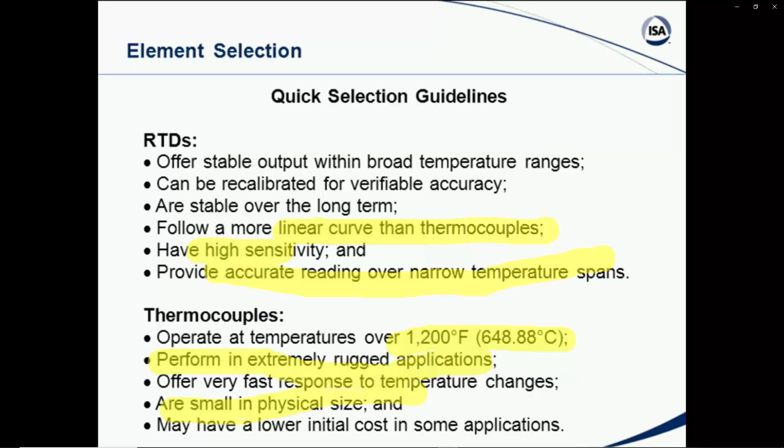So again, here's some quick selection that points out the key items to consider. RTDs - they're stable, they have broad temperature ranges, they have a more linear curve than thermocouples, highly sensitive, pretty accurate reading. Thermocouples, though, look how they go up to extremely high temperatures, very rugged, small in size, and probably have a lower initial cost. Again, these are some of the relative pros and cons of these different types of devices that I wanted you to be able to see.

Finally, a type of device you'll see occasionally installed, sometimes handheld, is a radiation pyrometer. If you're not familiar with that, basically you have a situation of infrared radiation emitted from the target. It can be picked up by a sensing head and converted to a corresponding temperature. In ideal situations, it works very well. It can sense temperature of moving objects, like on a conveyor belt or materials coming out of heat treatment. However, the problems you can run into in the real world are things you have to be careful of, so you have to be very careful on the installation and use. They're very handy and do a good job, particularly for moving objects, but be aware that such a device exists, called a radiation pyrometer.

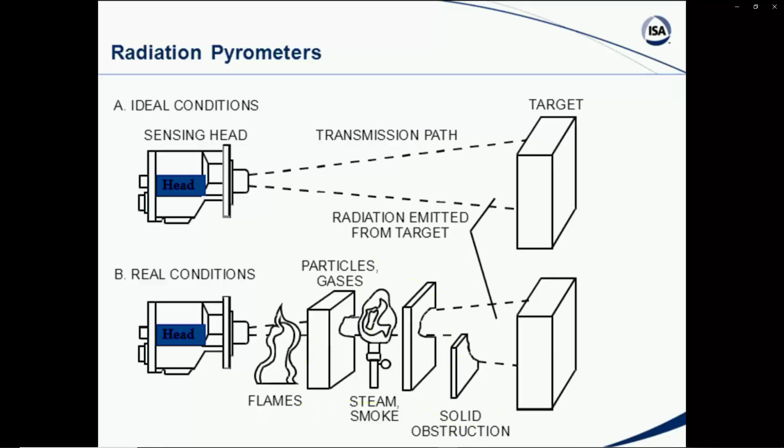Now, there are many different types of RTDs and many different types of thermocouples that we have not had a chance to go over. This is just to give you a flavor of some of the key points you might have to be aware of - the different scales, the fact that time lags are involved, it's a slow measurement. You've got to look at all the application considerations and the chart. They might give you a scenario of what's going on and ask you to select the proper one. We primarily focused on thermocouples and RTDs because these are two of the very primary ways that we measure temperature. So we've had to breeze through that, but I think we've covered the high points.

And let's pause one more time for any questions before we go through some sample problems.

I believe we have everybody recording now, so we will go back to the final part of our presentation today. Thank you very much, and we'll move to a few sample problems. Now let's see how some of these might look on a test.

Sample problem number 1: we have a tank level measured using a differential pressure transmitter, with a bubbler tube. The tank is vented to the atmosphere. The bubbler tube is a foot from the bottom, and the tank wall is 20 feet high. We've got a 0 to 10 psig differential pressure gauge, accurate to 0.25% of full scale, connected to the bubbler tube and to the high side of the transmitter. The low pressure side is connected to the tank top, with the tank containing liquid of specific gravity 1.2, and the level of the tank at 14 feet. The gauge reading in pounds per square inch is most nearly equal to...

And we've got 4 answers there. Always read the question very carefully. Take it apart, look at your units a little bit, don't jump in there too quick. Also, sometimes they'll give you extraneous information, but sometimes it might be useful.

For instance, here, I don't really care about the accuracy of my gauge. I also don't care that the low pressure side of my transmitter is connected to the tank top, because it's a vented tank. I do care that specific gravity is 1.2, and the level is 14 feet. However, it said a 0 to 10 psig differential pressure gauge is connected to this, and one of the answers is 13. Therefore, it's pretty unlikely I can have a 13 readout with a maximum point of 10 psig.

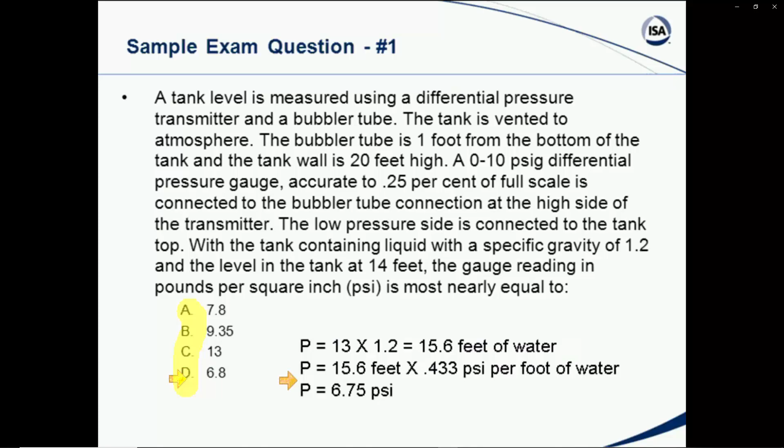Now, what are the units over here to the side? These are PSI on answers A, B, C, and D. So if I use that as a basis, my answer would be D, 6.8. Now, I mentioned before, don't worry about the fact that 6.75 is pretty close to 6.8. Work it out like that, okay? Very good, now that takes care of that. Let's go to another one.

Well, let's look at one thing right off the bat. We like to eliminate things that are impossible — that may help us reduce the number of answers we're looking at.

For instance, here, if I'm going from 50 at 0.9 and going up to 1.9, if I just know that the temperature is going to increase, I can rule out A and B. So I can look at that and just say, hey, I know my temperature is going to go up, so it's not going to be 20 or 38. So now I'm down to halfway, but we don't really want to do that. We'd like to do it a different way.

So what we do in this particular situation is we'll set this up and say, okay, I want to know my new temperature at 212. If I compare it to my new temperature, and say that, well, first I've got to get a relationship between the two. Let me go back up and do this a different way to make sure we get this right.

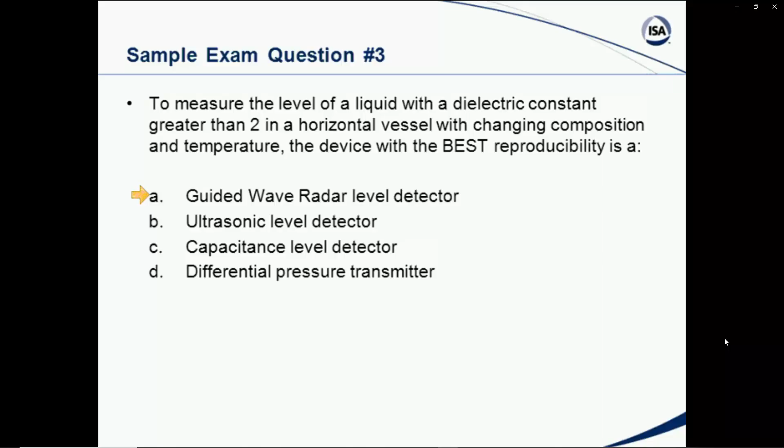Now, ultrasonic level detector would probably operate here, and some of you are probably saying, well, we use that at our place right now. I put those in. Sometimes they try to make the distractors, I'd say, distinguishable, but also they want them not to be ridiculous. So some of these are a little bit subjective, and probably on the exam they could be the same way. But in this case, that would be the most appropriate answer.

Number 4, another scenario question. Which of the following flow meters can be used to directly measure the volumetric flow rate of a fluid? Differential pressure, magnetic, positive displacement, turbine, and vortex shedding. Of these, which one directly will measure the volumetric flow rate?

If you recall, we said the positive displacement would. Now, you say, well, no, wait a minute. I thought you said we use differential pressure orifice plate to measure volumetric flow rate. Well, we do, but we measure differential pressure.

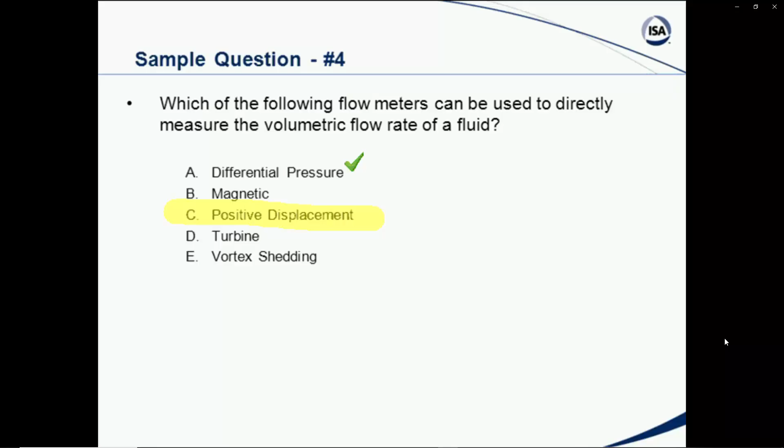What do we measure with magnetic flow meters? The velocity. What about turbine flow meters? The velocity. What about vortex shedding flow meters? The velocity. And that's all based on the relationship we talked about, Q equals A times V. So in many cases, we actually measure the velocity, we know the area, and that can be used to give us the volumetric flow rate. But in the case of the positive displacement meter, it measures the volumetric flow rate directly, and that's what this question asks for.

Okay, so some questions are just knowledge-based, and you just hope they're the ones that you know very well and can answer. So that's what you're looking for.

Okay, number 5, real quick. The flow of water in a 4-inch pipe is measured with an orifice plate and differential pressure transmitter. At a flow rate of 120 gallons a minute, the differential pressure is 27 inches of water. At a flow rate of 176 gallons per minute, the differential pressure will be approximately equal to 12, 18, 58, and 68. All right, look at your question, read it carefully, understand the question.

First of all, we start out at 120 with 27 inches of water differential pressure. And then we're going to 176, and we want to know what the differential pressure will then be. Well, first of all, let's say we're increasing our flow. In what direction will our differential proceed? You say, well, it's going to go up, and you're exactly right, and that's why we know it's not going to be 12 or 18. So we just reduced ourselves to 2 answers, even if we had to guess.

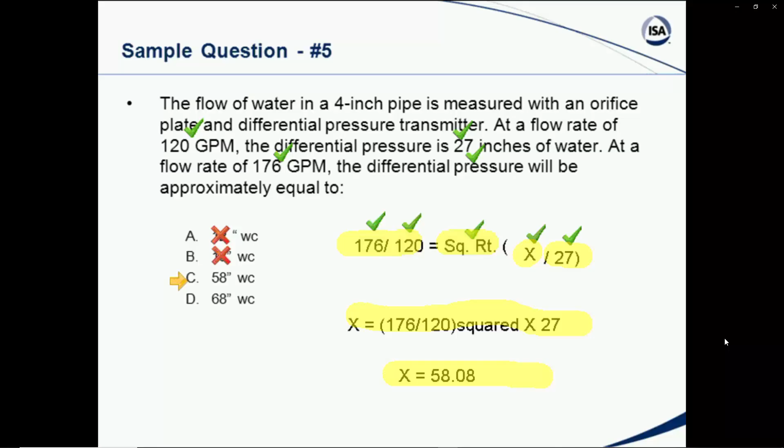The key point here is flow rate through a differential pressure producing device is proportional to the square root of the differential. So what we said at this point here was 176 is to 120 as the square root of the new differential divided by the old differential. Then if you solve for x, you get this, and the final answer is here. So that's an example from our differential pressure and our square root world that we have as far as differential pressure flow measurements are concerned.